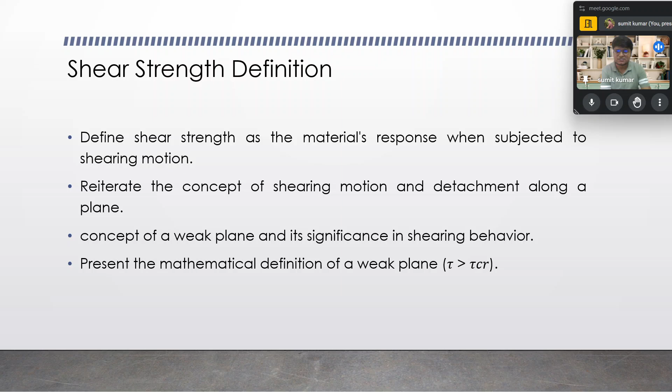So this coursework is named Geotechnical Engineering 2. Till the last 4 weeks, we have understood the different points of shear strength, the Mohr circle, how the Mohr circle works, how the different tests are performed. In the previous class, we started with the definition, and afterwards we moved to the factors that affect the shearing criteria in one way or another.

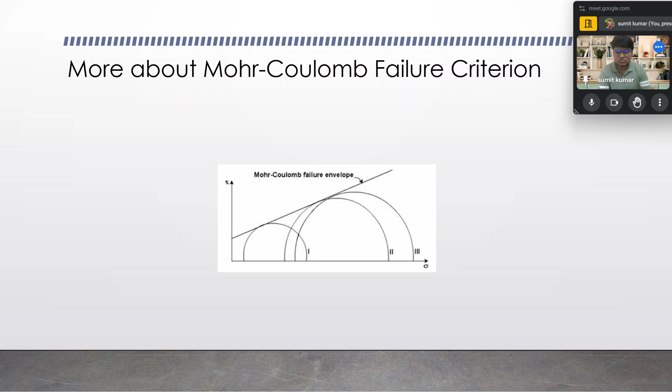We have taken the example over there. We vary the sigma 3 value first, and afterward the deviating stress is applied, and we see how the variation takes place. Those things are discussed with the help of this graph as well. Apart from that, what I said earlier will also be discussed here.

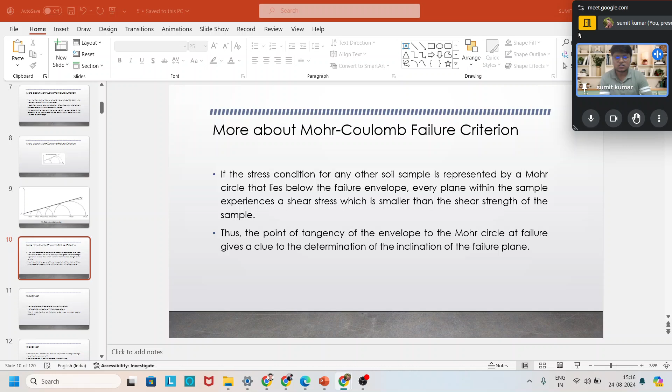Yes, right. Okay, so we are talking about what we have gone through during the previous session, so that's a quick revision. We will move ahead with the new content. So we have gone across the Mohr-Coulomb failure criteria.

We understand how the Mohr-Coulomb failure criteria takes place. We understand the triaxial test, the three types of tests performed during the triaxial test, like UU test, CU test, and CD test. We have gone across that.

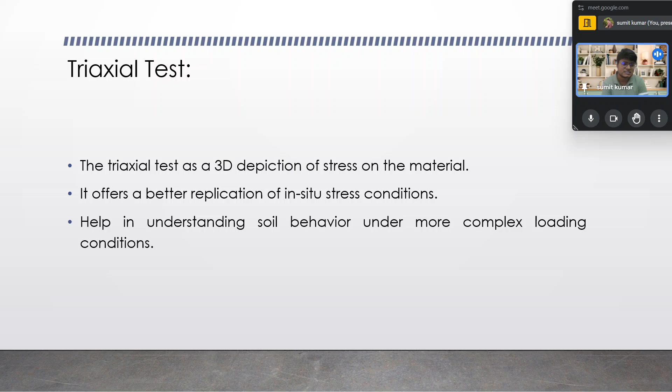We understand how these tests affect conditions, what are the drainage conditions in which the volume remains constant and how the volume gets changed. We also understand that if we consider the effective stress criteria and the total stress criteria, how the value of C and phi, and C dash and phi dash, changes for the different tests.

We also understand the equipment size normally used, like the length to diameter ratio and so on. We have seen the schematic diagram and the test procedure. I am not going to discuss it today because we have already covered it. I'm just giving a quick recap so that the things we have gone through during the previous class will be in your mind.

Okay, so we have understood those things. Setups - what are the setups? What is the first stage, like the consolidation stage, and the second stage, the deviating stage. In the consolidation stage, the pressure is applied with the help of water. First of all, how the sample is prepared.

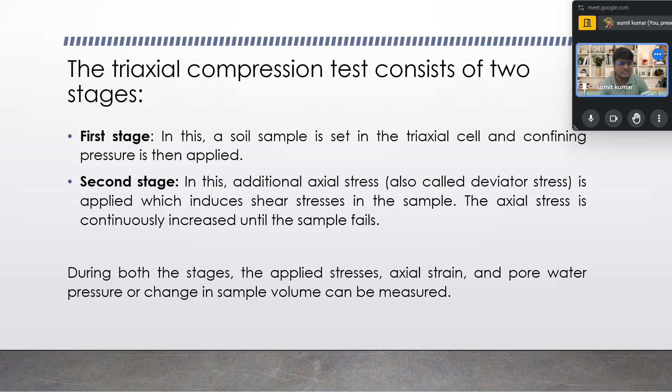That's not the problem. Okay, and we have understood the pore water pressure measurement, analysis parameters, like cohesion and angle of internal friction.

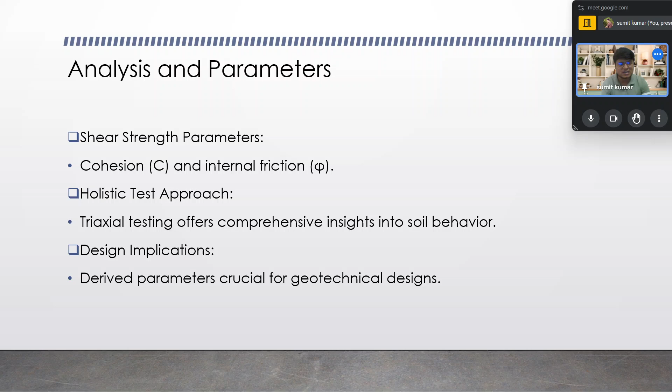We have to understand some of the important formulas. Remember that sigma 1 equals sigma 3 times tan square of (45 plus phi/2) plus 2c tan(45 plus phi/2). Sigma 3 is the stress during the confining stage. Sigma 1 minus sigma 3 equals sigma d, the deviator stress applied during the second, deviating stage. Okay, so those things we have discussed.

We understand the significance of the triaxial test, how it implements the physical field condition. As some new people have joined, I will again explain the physical significance involved, that's not a problem. Some points are also covered in this lecture which we will discuss about the triaxial test before moving to the problem, so that's not an issue, but I suggest you see it.

We have understood the triaxial test, and we see that it signifies the real field condition in a laboratory in a way. How? Consider there is a table in your room, and consider that the soil mass from the ground to the height of the table is soil. If you consider a specific section, say 10 or 20 cm below the table, a cylindrical soil section, you can see it, assume this pen represents it, it's not very visible.

If you consider a specific cylindrical section, the stress on that section is applied by the adjacent soil mass only, and that stress is applied in the laboratory with the help of water in the triaxial test. As some building or construction work goes on over the soil mass, some stress from above is also applied, which actually happens in the physical condition as well. So it simplifies the practical implementation of the field soil condition into the laboratory in one way or another. We will keep discussing this again and again until we finish shear strength; afterwards, when we move to earth pressure, we will move to a new condition. So we understand the significance, and that's where it lies.

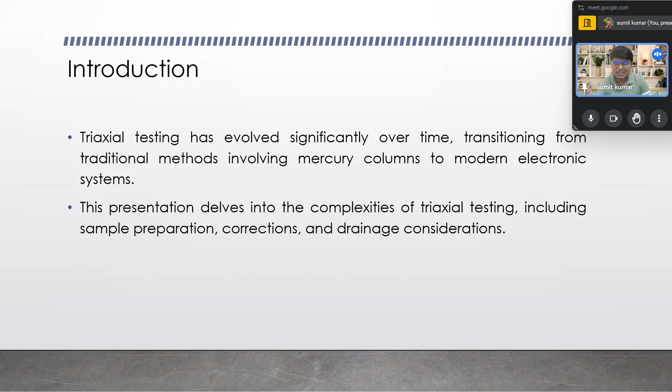We also understand the advanced insights in triaxial testing techniques. We have understood the mercury column era, and in the modern era, how load frames, plungers, and probing devices came into use, whereas earlier mercury-based things were used. As technology advanced, the calculations became more precise, and the results obtained are very close to what actually happens in the field. So that's what we have understood.

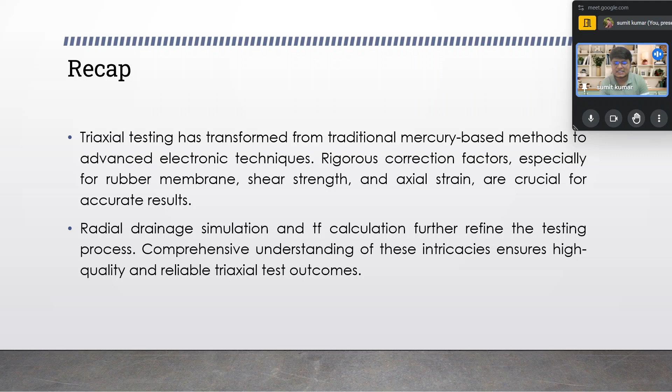We also understand the correction factor, its importance, and why it is needed, like the radial drainage consideration and different approaches we have understood. We have also understood the UU test and CD test over there.

We understand that in the UU test, the unconsolidated undrained test, during both stages, the consolidation stage and the deviator stress stage, drainage is not allowed, water is not allowed to flow out, so the volume remains constant. We have understood these things, and also the CU and CD tests, how the Mohr failure envelope is formed, and whether C_CU equals C_CD or not, and why not. So those things we have understood during our previous lectures.

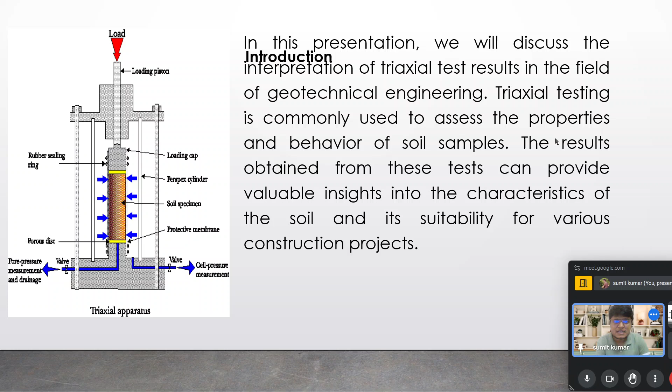So we will move ahead and see in this presentation, in today's lecture, we will discuss the interpretation of the triaxial test result in the field of geotechnical engineering.

Triaxial testing is commonly used to assess the properties and behavior of soil samples. The results from these tests can provide valuable insight into the characteristics of the soil and suitability for various construction projects. From the very first class, I have said clearly what these things are, when we are performing these tests and gaining knowledge in this direction.

We should always ask three questions whenever studying anything: why it is important, why we are reading it. So why is shear strength so important? Shear strength is important in all types of projects. Before construction of any superstructure, infrastructure project, building, road, or railway structure, we need to understand how much load the soil could bear before designing any foundation. That's why shear strength is one of the most important criteria.

The purpose of triaxial test: it is primarily conducted to identify any issue with the soil, as well as to validate the effectiveness and compaction effort. By measuring the pore water pressure during the undrained testing, engineers can gain a better understanding of the soil response and behavior under different stress conditions. This information is crucial for developing an approach for any construction work.

When interpreting pore water pressure, as I said in the second class, water is the biggest enemy of the soil. If the water table is far below the ground surface, 90% of the problem gets eradicated. As you may recall from geotechnical engineering one, in the chapter on total stress, effective stress, and pore water pressure, you understand that as the water table rises, the effective stress value decreases.

Initially we understand shear strength equals C plus sigma tan phi, but later we see shear strength equals C dash plus sigma dash tan phi dash, because we consider the effective stress. Earlier constructions based on the total stress approach got damaged afterward, so the modified Mohr Coulomb theory evolved, stating that as the water table rises, suppose up to the ground surface, the effective stress gets reduced by almost half.

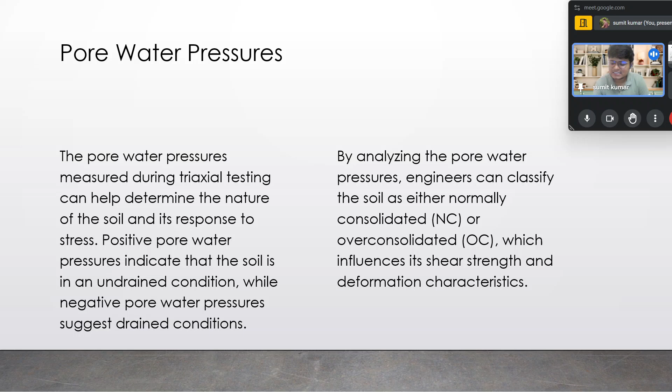Now developing the Mohr failure envelope: the results obtained from the triaxial test can be used to develop the Mohr failure envelope. As shown in the recap of the last session, the value of sigma 3 is found, and by varying sigma 3 and sigma 1.

By varying the value of sigma 3, the sigma 1 value also got changed. By drawing a common tangent passing through those Mohr circles, the Mohr Coulomb failure envelope is formed. When plotting that, the intercept on the tau axis is said to be cohesion, and phi is the angle of internal friction, which is the angle made by the horizontal axis with the intercept of the Mohr Coulomb failure envelope.

When we talk about economic consideration, it is most important to consider the economic aspects of geotechnical engineering projects. The process of filling and compacting soil involves significant cost, as it requires excavation, crushing, and compaction of soil material. That cost needs to be understood and taken care of during construction activity and testing, so we try to justify those things. Engineers must carefully analyze the results and optimize the construction process to ensure cost effectiveness and minimize potential risk.

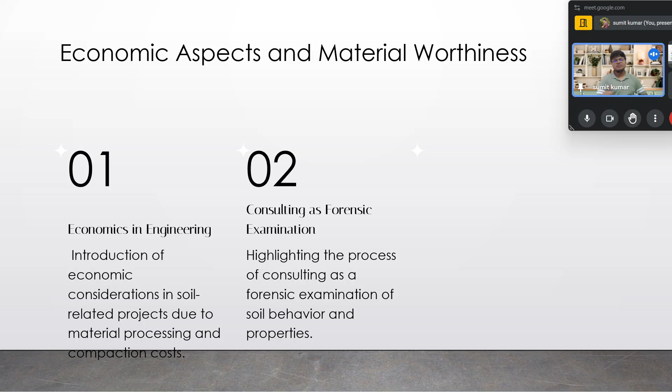Okay, so we will recap this section. We understand the tri-axial test result is a critical aspect of geotechnical engineering, and one of the most important things is pore water pressure and the development of the Mohr Coulomb envelope. Considering the economic factors, engineers can make informed decisions regarding the suitability and stability of soil for various construction projects.

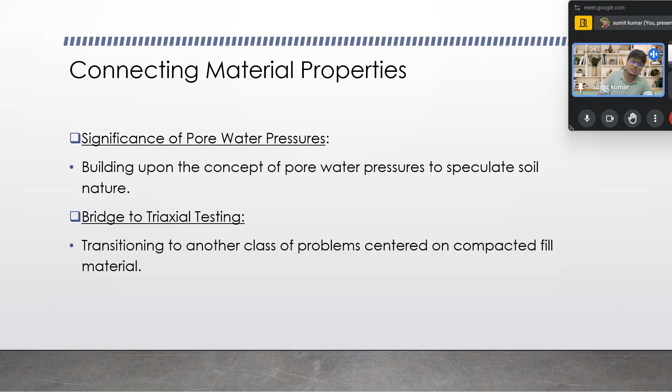Now, compaction and soil characterization reflect methods like the sand replacement method and the core cutter method. As you are aware, the core cutter method allows us to find the dry density and the optimum moisture content of the soil. How the core cutter method is performed, you must be aware — if not, I will explain quickly. In the core cutter method, first we take equipment like the hammer and the core cutter equipment.

We take it to the field. We clean a place over there and want to perform the test. After that, the collar is placed over the core cutter, the cylindrical sample, and then the hammer is applied from the upward direction.

The core cutter gets inserted into the soil. Afterwards, we excavate the core cutter by removing the soil around it without disturbing the soil sample within it.

After that, we determine the moisture content by taking a sample of soil from the interior. Once the moisture content is found, and since the weight of the soil in the core cutter is known, we find the bulk density, as its volume is also known from its length and diameter. After getting the moisture content, we apply the relation gamma D equals gamma B by 1 plus W, where gamma D is the dry density, gamma B is the bulk density, and W is the water content. With the help of that, we are able to find the dry density.

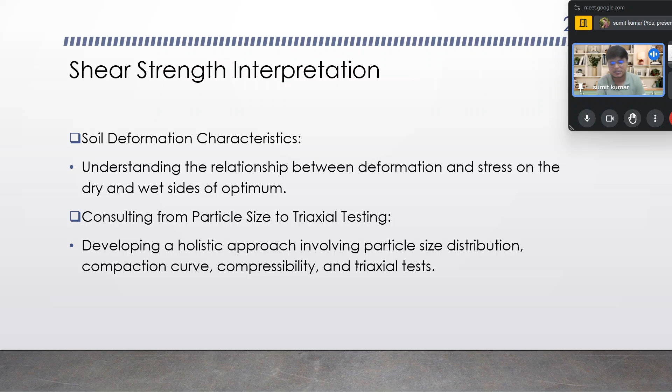So these are the questions, but everything is not mentioned over here, so leave it, we will not cover this here. In the last 15 problems these questions are repeated again, and I will explain there.

The soil compaction to the shear strength analysis exemplifies the intricate layers of geotechnical engineering by skillfully combining laboratory tests and field knowledge. Engineers unlock insight crucial for the safe and efficient execution of soil related projects.

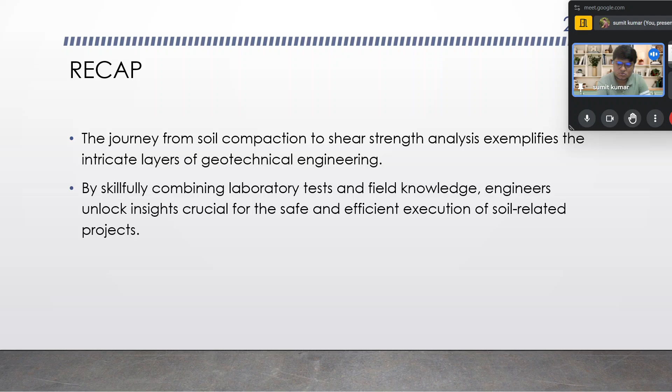Now we are going to decode the soil behavior through shear strength analysis, a deep dive into soft clay. First we start with the introduction for this section. So give me a minute.

In geotechnical engineering, we explore the dynamic relationship between compaction, shear strength, and pore water pressure in soft clay. We understand how the undrained test, specifically the CU test, reveals crucial information about soil behavior. When we say CU test, we mean the consolidated undrained test.

In this test we understand things like long term and short term stability. When we say long term and short term stability, we consider how much time the test takes, like in the triaxial test we also have the CD test, which takes place very slowly as compared, because when we say CD test, the consolidated drained test, the water is allowed to flow out during both stages.

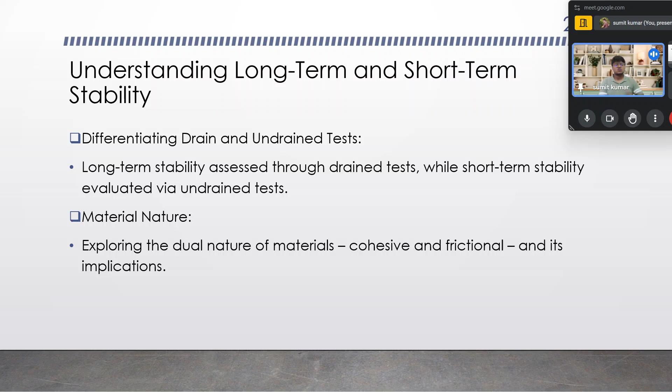So when we talk about the material nature, there is a dual nature of material - cohesive and frictional - and its implication. It is always believed that soil is not only cohesive or only sandy. The soil should be C-phi soil, meaning it must have some cohesion and might have some angle of internal friction, which implies the soil property at any specific site.

So you need to understand those things as well when we discuss a problem in which a UU test is conducted on a soft clay sample, prompting about its nature and its necessity for triaxial testing.

So here, a test method like the unconsolidated undrained (UU) test using a vane shear test setup takes place, because we know the vane shear test is performed on soft soil. Over there, a torque T is applied, and the relation is T divided by pi d square into H by 2 plus D by 6, where H is the height, D is the diameter of the vane, and H is the height of the section which is inserted into the soil.

That is one way and another way - there the H by 2 plus D by 6, and the H plus D by 12 relations are there.

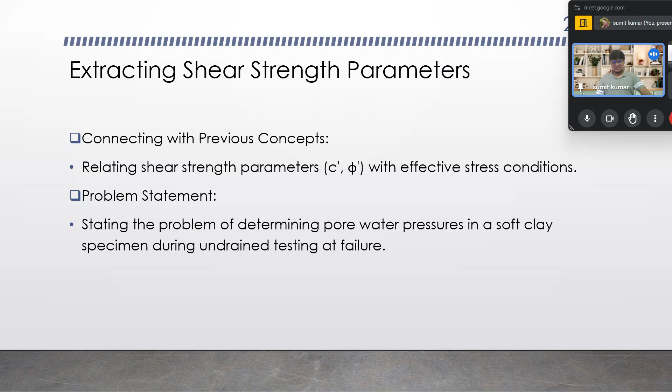Now when we talk about the Mohr circle and its envelope, we create Mohr circles for the three specimens and establish a unique Mohr circle envelope for the soft clay, analyzing the stress condition and their relevance for the problem - identifying soft clay as a normally consolidated (NC) material and deriving the parameters phi not equal to 0 and c dash equal to 0.

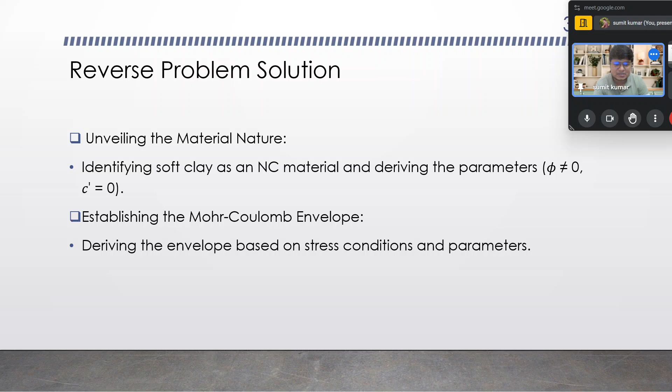After that, establishing the Mohr-Coulomb failure envelope is formed. So sigma 1 and sigma 3 are known for the different specific sections, by which we draw the tangent to form the Mohr-Coulomb failure envelope. As we see, the comprehensive failure condition relative to the pore water pressure is also formed.

So here we understand the intricate process of revealing the soil behavior in soft clay through the undrained test, and the continuous material properties test condition, and the laboratory method under the problems required for geotechnical engineering analysis.

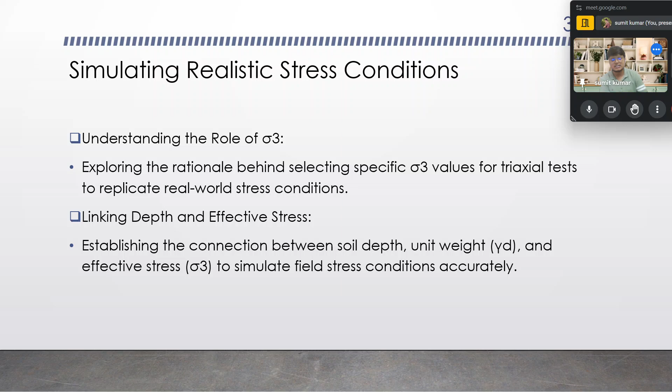The role of back pressure is very much important as it is a concept of applying back pressure during the triaxial test to prevent the sample from collapse and signify real life conditions as in the field. The back pressure, in addition to the pore water pressure, is preserving the physical integrity of the sample.

As you are aware about the Skempton parameters A and B, we talk about sigma and B, A and B are there. So B is delta U by delta sigma 3. And A bar is equal to AB, where A bar equals the change in pore water pressure during the deviating stress condition. By interrelating those two, we are able to find delta UD.

When we talk about the significance, when the value of the Skempton pore water parameter B is one, we say that the condition of saturated condition is achieved.

Exploring the limitation of the traditional triaxial testing for unsaturated soils, and the need for back pressure to ensure the saturated condition, we perform this. As you may be aware or have seen the triaxial apparatus, the demonstrated figure was also seen during the last class.

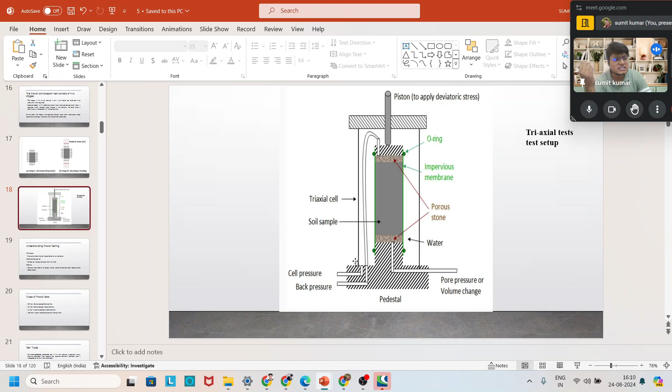Over here you can see that the pore water pressure, cell pressure, back pressure, everything is demonstrated. We are talking about these things only over there as well. The schematic diagram is seen by you. Now I will move ahead.

So the limitation of the traditional triaxial testing for unsaturated soil, and the need for back pressure to ensure the saturated condition, is now possible in modern setups. The technique of using back pressure to saturate the unsaturated soil sample makes them suitable for conventional testing. When we talk about the different phases involved in the testing, first is the sample consolidation and undrained testing.

In this phase, the undrained condition and its importance for pore water pressure development is taken care of.

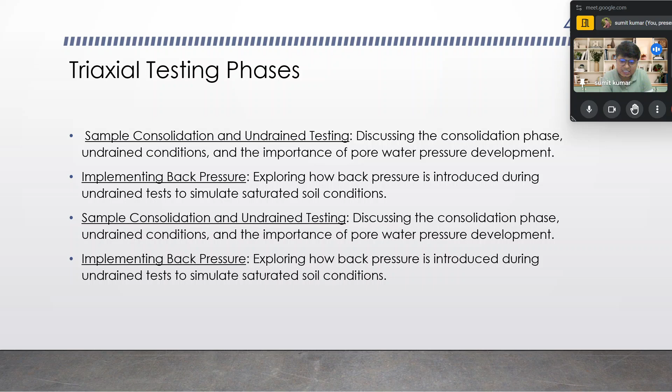Afterward, the back pressure is implemented, in which we explore how back pressure is introduced during the undrained test to simulate saturated conditions. Then sample consolidation and undrained testing takes place, discussing the consolidation phase, undrained condition, and importance of pore water pressure development. Afterwards, implementation of back pressure takes place, exploring how back pressure is introduced during the undrained test to simulate saturated soil conditions.

When we talk about the stress path and soil response, the stress path and the Mohr-Coulomb envelope, revisiting the stress path, as you are aware about the PQ curve, P is sigma 1 plus sigma 3 by 2, and Q is sigma 1 minus sigma 3 by 2.

So the stress path is plotted in that way only. When we talk about the stress path, we understand the regulation of shear strength.

As we talk about its applications, the stress path concept applies to practical scenarios like basement construction and excavation, as you see that we have been able to...

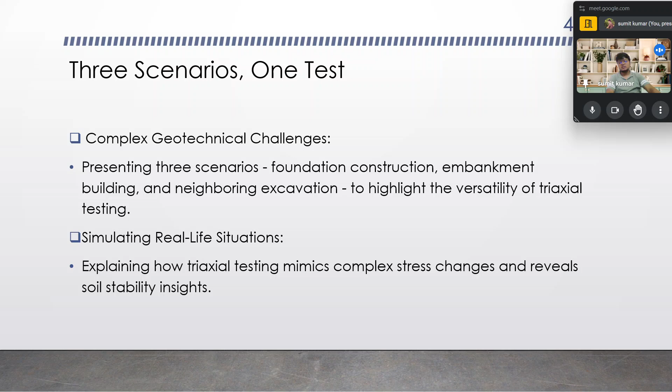When we talk about some more scenarios like complex geotechnical challenges, there are three scenarios: foundation construction, embankment building, and new construction in the neighborhood of existing conditions, to highlight the versatility of triaxial testing. Simulating the real life situation, exploring how triaxial testing mimics complex stress changes and reveals soil stability insights.

When we conclude this section, we say that in triaxial testing, augmented by the concept of back pressure, this emerges as a robust technique to mirror natural stress conditions and unravel soil behavior by manipulating stress and preserving sample integrity.

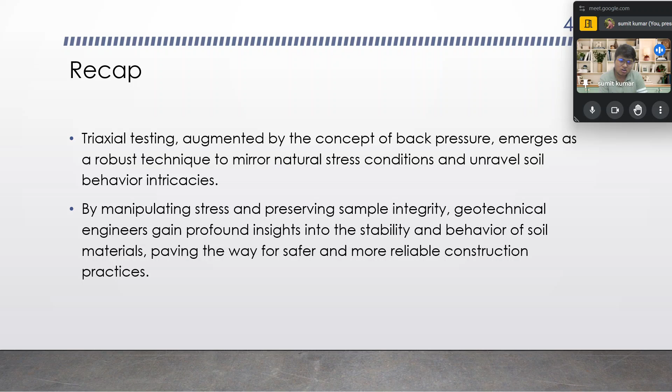Geotechnical engineers gain profound insight into the stability and behavior of soil material, paving the way for safer and more reliable construction practices.

Then we talk about factor A and factor B. First of all, A is delta U by delta sigma 1 minus sigma 3, the change in pore water pressure by the change in stresses in the deviatoric section, whereas B is delta U by delta sigma 3, where A dash is equal to A into B.

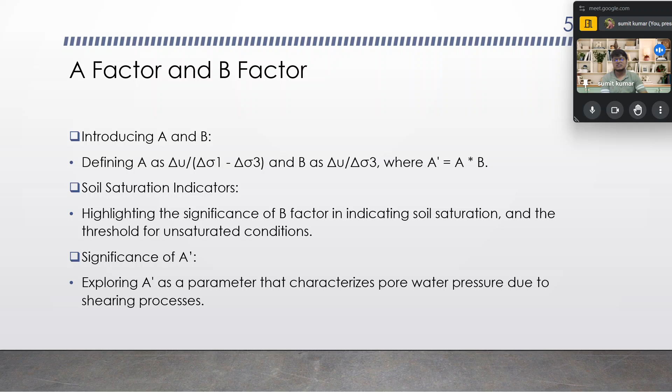When we talk about the significance of A dash, it's a parameter that characterizes the pore water pressure due to the shearing process as it takes place during the shearing condition in the deviatoric stress condition.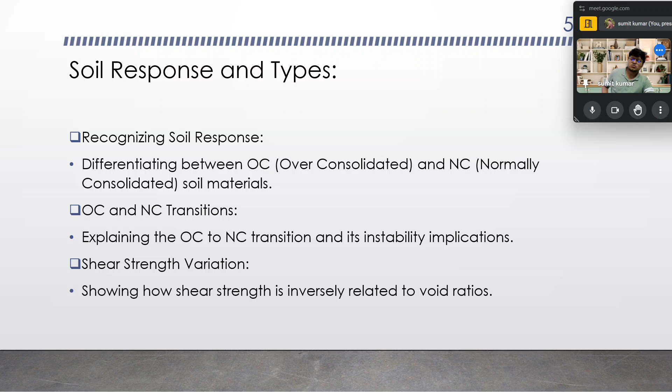Demonstrating that B equal to 1 characterizes the saturated sample as said earlier, and analyzing how parameter A represents the pore water pressure changes due to shearing, and the difference between over-consolidated and normally consolidated soil material, explaining the over-consolidated and normally consolidated transition and its instability implications, showing how shear strength is inversely related to the void ratio.

When we talk about a triaxial testing scenario, evaluating A as a function of over-consolidation ratio and its significance for designers, as it is very important during the test to know whether the soil is in the saturated state or not, or whether it is in the unsaturated state.

It is signified with the help of this parameter only, stressing the importance of cross-checking results with material properties, the stress range, and the project objectives, exploring different tests, discussing the five types of triaxial testing problems, and providing insight into interpretation of the results.

When we recap this section, we say that the triaxial test stands as a cornerstone in geotechnical engineering, offering a profound understanding of soil behavior under different stress scenarios by comprehensively analyzing parameters like back pressure, A and B factor, and characterizing the soil.

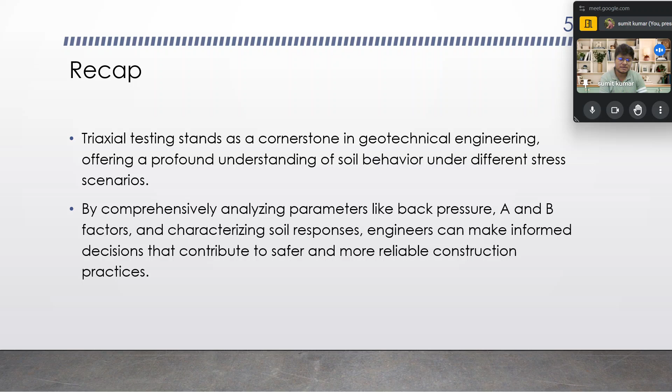This way, engineers can make informed decisions that contribute to safer and more reliable construction.

Now, understanding the pore water pressure parameter in triaxial testing.

So first of all, we start with the introduction, in which the presentation focuses on comprehending the pore water pressure parameter in triaxial testing discussed here. Determination and implementation of understanding these parameters is essential both for academic purposes as well as for practical implementation by design engineers.

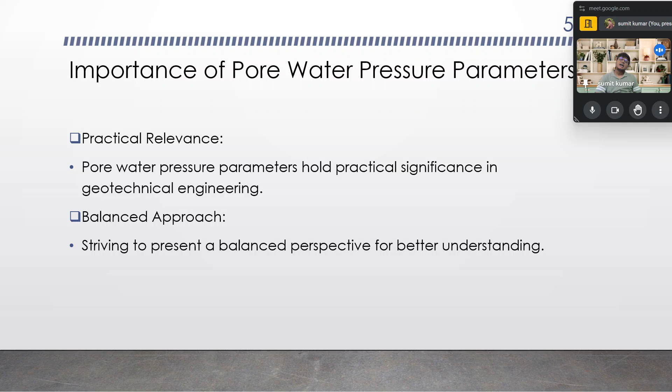The pore water pressure parameter holds practical significance in geotechnical engineering, and we strive to present a balanced perspective for better understanding, explaining isotropic loading as a stress applied uniformly from all directions, like sigma 1, sigma 2, sigma 3.

The Skempton equation relates delta U equal to delta U1 plus delta U2, relating isotropic loading to delta sigma 3 through the B parameter, defining the B parameter as delta U1 by delta sigma 3 and its role in characterizing the soil mass.

The B parameter formula is B equal to 1 by 1 plus CV by CC, where CV is the fluid compressibility and CC is the soil skeletal compressibility.

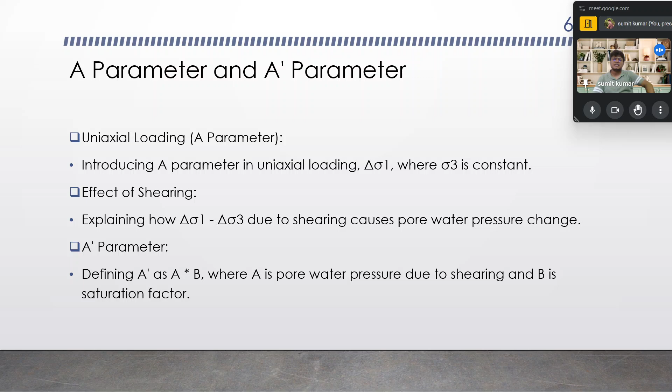The A parameter, when we talk about uniaxial loading, is introduced at delta sigma 1 where delta sigma 3 is constant, explaining the effect of shearing and how delta sigma 1 minus delta sigma 3 due to shearing causes pore water pressure changes. We define A dash as A into B, where A is the pore water pressure parameter due to shearing and B is the saturation factor, which is 0 for unsaturated soil and 1 for saturated soil.

When we formulate the total pore water pressure, deriving the equation U equal to B into delta sigma 3 plus A into delta sigma 1 minus delta sigma 3, its simplified form utilizes the A parameter, providing flexibility in using the parameter depending on soil condition and testing objectives.

When we talk about these applications, we will see the problems at the end regarding the same. When we talk about the role of B as the saturation sample, we explore B equal to 1 as a saturated sample and its implications on soil saturation.

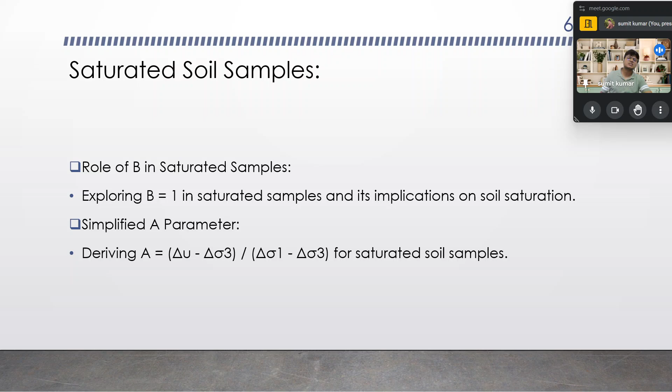When we simplify the A parameter, deriving A as delta U minus delta sigma 3 by delta sigma 1 minus delta sigma 3, for the saturated soil sample. And when we talk about conventional tri-axial cell testing, describing the process of fixing sigma 3 during consolidation and its effect on the A parameter.

When we talk about determining delta sigma 1, we explain how the change in sigma 1 is determined using load cells or a proving ring.

When we recap this section, we say that the pore water pressure parameters B and A hold valuable insight into soil behavior under different loading conditions. Understanding their derivations, applications, and significance in various scenarios equips the geotechnical engineer with essential tools for accurate interpretations and informed decision making in the field.

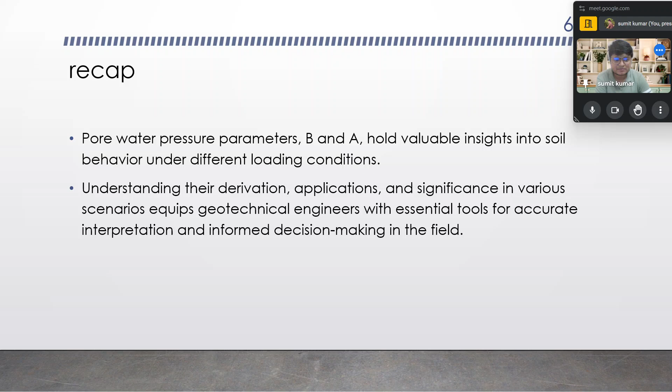Now we are going to explore the pore water pressure parameter through practical examples. So what are the examples we are going through? We will see over here.

As we talk about the Skempton parameters B and A, we come to know B as the Skempton parameter. With the help of that, we are able to find in the tri-axial cell testing whether the sample is saturated or unsaturated. Similarly, with the help of A, we reveal the situation during the deviatoric stress condition.

Before formulating the sample, first of all in the laboratory, when we go to form our sample, we see that first we make our sample stand in the confining stage. So we have to understand at what time the stress needs to be applied from the vertical direction, in order to achieve enough stress that failure takes place in the deviatoric condition, so that sigma 1 and sigma 3 would be found to form a Mohr circle.

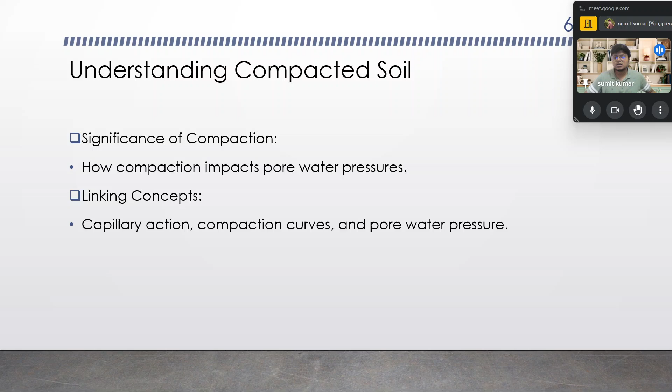And when we talk about its significance on compaction, we say how compaction impacts the pore water pressure, how capillary action, compaction curves, and pore water pressure work out.

Okay, how do we calculate the parameters? We say that A parameter is defined as A dash equal to A into B, and its significance. So the A parameter: A equal to delta U minus delta sigma 3 by delta sigma 1 minus delta sigma 3. And when we talk about material characterization, it highlights the role of tri-axial testing in understanding soil behavior and the shearing process.

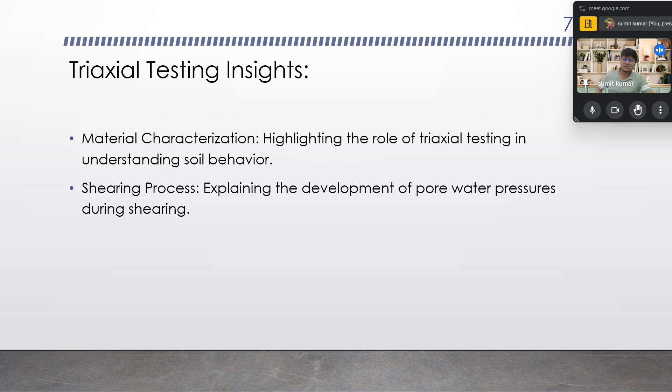Now we analyze the pore water pressure parameter and the shear strength of soil. Before we go ahead, we will go through the questions which I put out for you, and you will go through those problems before moving ahead.

Okay, see. Okay, so I will take a pen as well.

So we are going with the questions that will make you understand the things which we are studying, how we are solving the problems related to the things we are covering here. Okay, first of all, what is the first question? The first question is a simple true and false question, and these are the most standard questions asked in the GATE examination or the civil engineering services examination. So the first question is: true or false?

This is a true or false problem. The question says that if the Mohr circle for a given state of stress lies entirely below the Mohr circle envelope of a soil, then the soil will be unstable for that state of stress. Whether it is true or false - one can easily say that this statement is false, only because...

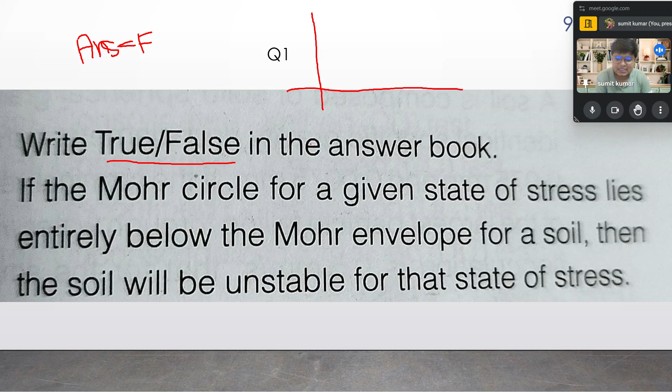At this point, this is sigma 3, this is sigma 1, this is sigma 3 dash, and over here sigma 1 dash, right? So this is the failure envelope, and if at any point a stress is at this position - if the Mohr circle of a given state of stress lies entirely below the Mohr envelope of the soil, then the soil will be unstable.

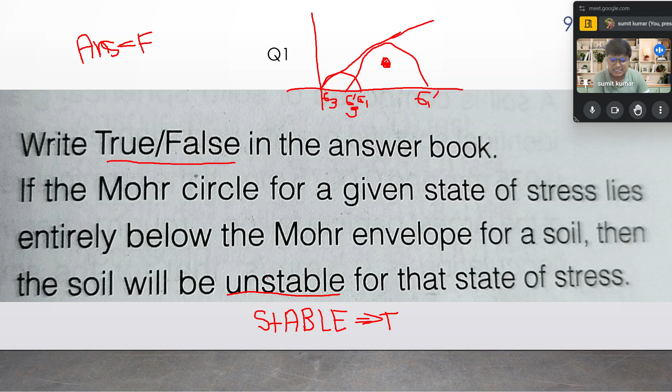Unstable is a word which is false. If it is stable, then there is no problem. But over here it is written unstable, so if it is stable then it is going to be true. But as it is mentioned unstable, when the state of stress is below, unstable is false. That's why our answer is false.

Explanation is also mentioned over here: if a Mohr circle for a given state of stress lies entirely below the Mohr circle envelope of the soil, then the soil will be stable for that state of stress, right? So this is the first and very basic problem.

Now we move to our next problem. It says that an unconfined compression test yields a strength of 0.1 Newton per mm square, if the failure plane is inclined at 50 degrees to the horizontal. What are the values of the shear strength parameters? So it's asking about the value of C and the value of phi for the given condition, right?

I think this is understood. So unconfined compression test yield strength - this is the shear strength S, and it is asking about C and phi. So over here you see the unconfined compression test. The value of sigma 3 is 0, and shear strength S equal to 2C tan(45 + phi/2). Sigma 1 equal to sigma 3 tan square(45 + phi/2) plus 2C tan(45 + phi/2), right.

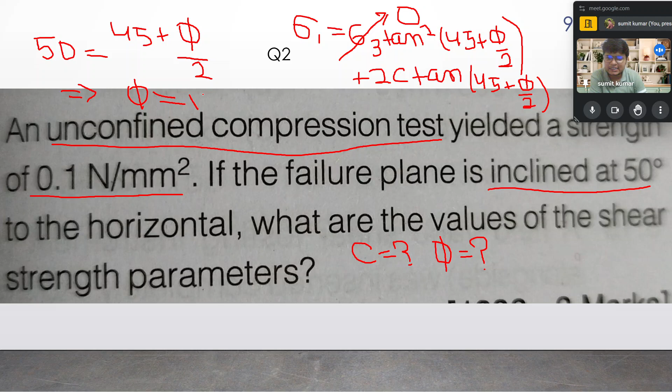So the value of phi should also be known. By solving this, we get 50 minus 45, so phi equal to 10. Now we need to find C only. As phi is known and sigma 1 is known, you can find C as 0.0419 and phi as 10 degrees, which we already found in our previous section, okay right?

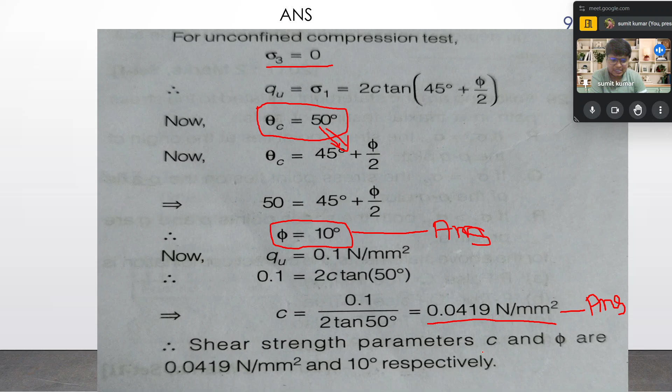Right, so our shear strength parameters C and phi are found. So this is the question over here. Now we move to our next problem. The next problem says that in the unconfined compression test the clay fails in the range. Okay, what is the question?

Compression test of a stiff clay fails in the range of 50 kilonewton per meter square, 50 to 100, 100 to 200 or above 200. So over here the answer is going to be 100 to 200 kilonewton per meter square as it is the standard value, right? Okay, now we move to our next problem.

So over here two problems are mentioned. The first problem states: what is the shear strength in terms of effective stress on a plane within a saturated soil mass at a point where the total normal stress sigma n is 295 kPa and the pore water pressure is 120 kPa, and the effective stress and shear strength parameters C dash and phi dash are given.

Normal stress is 295 and pore water pressure is 120. So S equal to C plus sigma n tan phi. So sigma n is going to be 295 minus 120, right? Okay, so where is the pen? The solution is already mentioned on the next page, but for understanding, S equal to C plus sigma n tan phi.

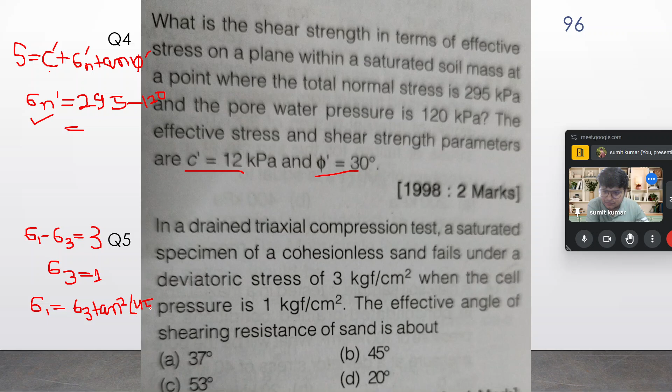And the effective angle of shearing resistance of the sand is what they are asking. So we will solve sigma 1 equal to sigma 3 tan square of 45 plus phi by 2, right?

So from here, when we use the value of sigma 3 as 1 and value of sigma 1 as 4, and when we solve that, we are able to find the value of phi. See, sigma 1 minus sigma 3 is known, sigma 1 is 4, sigma 3 is already known as 1, and when we solve, we are able to find the value of alpha first - 45 plus phi by 2 is called alpha - and after that we find the value of phi at 37 degrees, so our answer is 37 degrees.

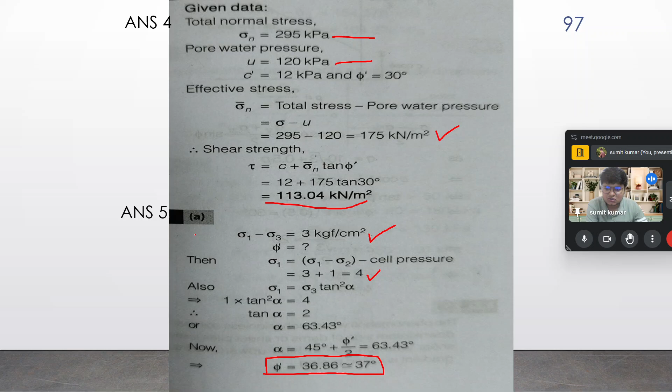Find the shear strength on a plane within a saturated soil mass at a point where the total normal stress is 300 and the pore water pressure is 150. This is similar to the previous problem, so I will not solve it from scratch since I'd be writing the same equation. I will directly go to the solution and explain from there.

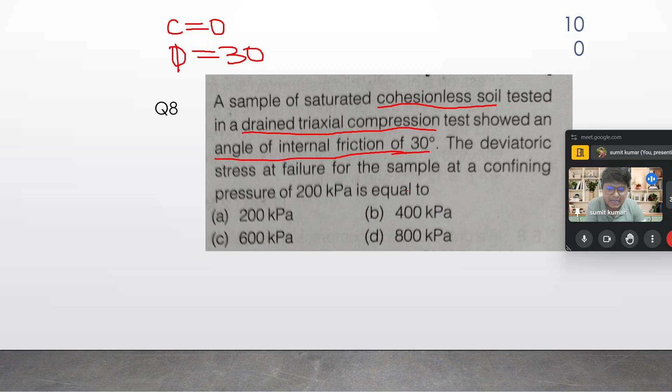The deviator stress at the failure of the sample at confining pressure of 200 kPa is equal to - it is asking sigma d is equal to what? And the value of sigma 3 is also mentioned as 200. So we apply sigma 1 equal to sigma 3 times tan square 45 plus phi by 2 plus 2C tan 45 plus phi by 2. So C is already 0.

So we say sigma 1 equal to sigma 3, means 200, tan square 45 plus 15.

Okay, now I will take a calculator, give me a minute. There is a calculator. I will take the calculator and do the calculation. So I will find 200. The value of sigma 1 is found to be 600.

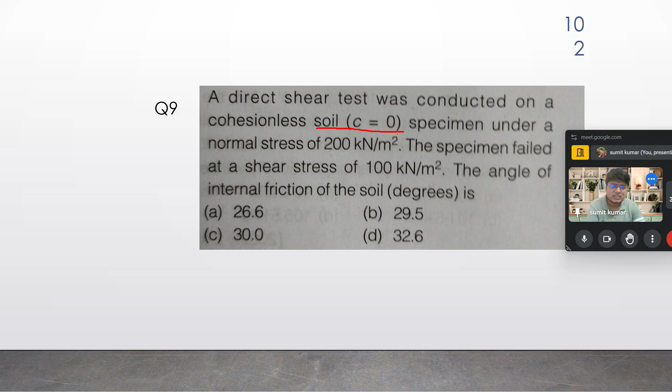Now we move to our next problem. Next problem states that a direct shear test is conducted on a cohesionless soil, C equal to 0 again - you have to mark it down. Specimen under a normal stress, sigma n, is mentioned as 200 kilonewton per meter square. Specimen failed under the shear stress of 100 kilonewton per meter square.

The angle of internal friction of soil in degree: sigma n into tan 45 plus phi by 2 plus C is equal to shear strength, tau, whatever you say. So over here C is 0, so sigma n tan 45 plus phi by 2.

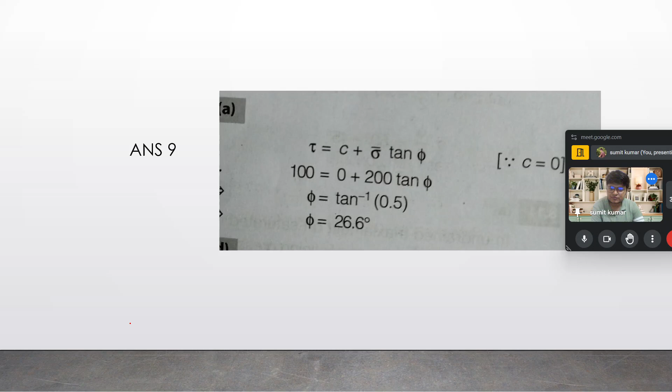Sigma s equal to c plus sigma into tan phi. This is not the sigma. I need an eraser.

Phi equal to 26 degree, 26.56. So option A is the correct answer. Right? Over here you can also see.

Now the next question is that a soil is composed of solid spherical grains of identical specific gravity, and the diameter is between 0.075 mm and 0.0075 mm, with the terminal velocity of the largest particle falling through water without flocculation being 0.5 mm per second. Then that for the smallest will be. So you see the largest particle is 0.075, right? And its velocity is 0.5.

So over here you can see we have to find the velocity through this. So when we make our relation v1 by d1 square equal to v2 by d2 square, as area into velocity is like v is proportional to d square. So from this when we solve, we found the velocity 2 will be nothing but 0.005 mm per second. So you can use 0.005 mm per second. Option number A as a correct answer.

Right? I think over here there will be no doubt in anyone's mind. We will move ahead. Now we will see our next problem. Yes, this is the problem related to vane shear test, and this is one of the most important problems because over here you see the diameter, height. When I talk about the interrelation, T by pi d square into h by 2 plus d by 6, so this is related to that only.

So the question says a field vane shear testing instrument shown alongside was inserted completely in a deposit of a soft saturated silty clay. As we know, this is applicable for soft soil only. If the soil is hard, it is not possible to rotate it, so we are not able to find the strength with the help of this test. So this is the soft saturated silty clay with a vane rod vertical such that the top of the blades were 500 mm below, 500 mm below. Why this is important? Because if it is not below, the relation which we usually use is not applicable.

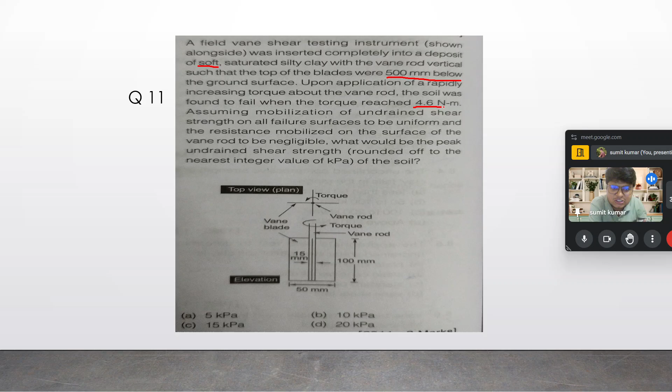So upon application of rapidly increasing the torque about the vane rod, the soil found to fail when the torque reached 4.6 Newton meter. This is nothing but torque T. Okay, I will write the relation as well. Assuming the mobilization of the undrained shear strength on all the failure surface to be uniform, and the resistance mobilized on the surface of the vane rod to be negligible, what would be the peak undrained shear strength rounded off to the nearest integer?

So over here, see, the value of tau is going to be T by pi d square into h by 2 plus d by 6. H by 2 plus d by 6.

Right? Over here, T is nothing but 4.6. D is... H is 100 mm, and D is 50 mm. Okay.

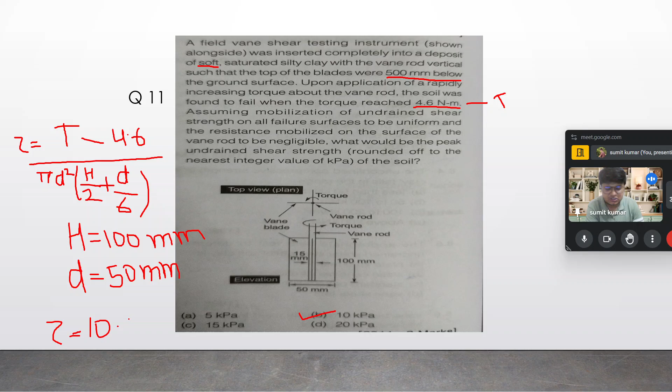Yes, right, so this is going to be our answer. When you solve, you found 10.04. Right, units need to be considered. Okay, so we move to the next problem from here.

As you see, for the set over here, different relations are written. That's not to worry, the relation what I have written is the same thing as this. And when you take the common T by pi d square, when you take common h by 2 plus d by 6, will become, and you are able to find that strength tau or cu, whatever the thing is, is the same in our relation. Okay, now move to the next problem.

Next problem states that for a saturated cohesive soil, a triaxial test yields the angle of internal friction phi as 0, phi as 0.

The conducted test is CD test, CU test, UC test or UU test. So this is a very simple thing. For the clay soil, it is nothing but the UU test, because that simplifies the real field condition - in clay, water is not allowed to drain out in either condition, because it takes too much time to flow out the entire water from there.

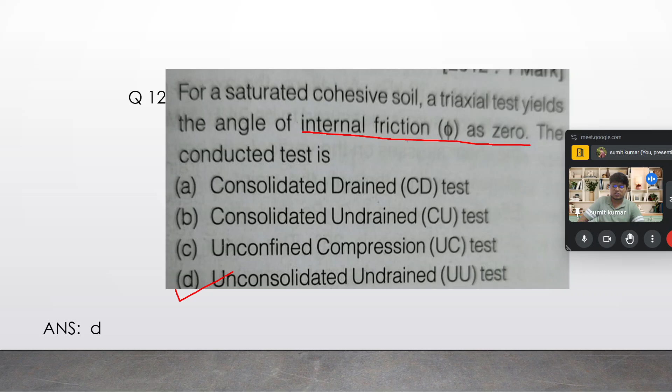Now we move to the next problem. The question states that in the unconsolidated undrained triaxial test, it is observed that an increase in cell pressure from 150 to 250 kPa leads to a pore pressure increase of 80 kPa.

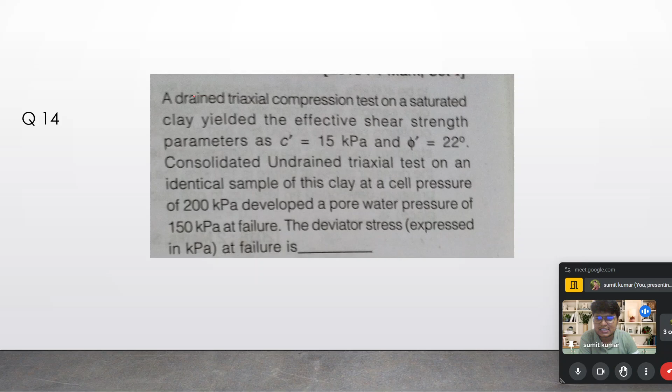The next problem states that a drained triaxial compression test on a saturated clay has effective shear strength parameters C dash and phi dash as given. A consolidated undrained triaxial test on an identical sample of the clay at a cell pressure of 200 kPa, so sigma 3 undrained is 200, developed a pore water pressure of 150 kPa. So U is 150 in the second condition.

They are asking about the deviatoric stress in kPa. So there is no problem in that - we use the relation sigma 1 minus sigma 3, and we use sigma 1 equal to sigma 3 tan square of 45 plus phi by 2, plus 2c tan of 45 plus phi by 2.

We know the value of sigma 3. We find sigma 1 and then subtract sigma 1 minus sigma 3. So first you use sigma 3 dash as 200 minus 150, that is 50, and then use the relation which I have written.

You see over here the relation is written: sigma 1 equal to sigma 3 tan square of 45 plus phi by 2, plus 2c tan of 45 plus phi by 2. Sigma 3 is known, C is known, phi is known, only sigma 1 needs to be found.

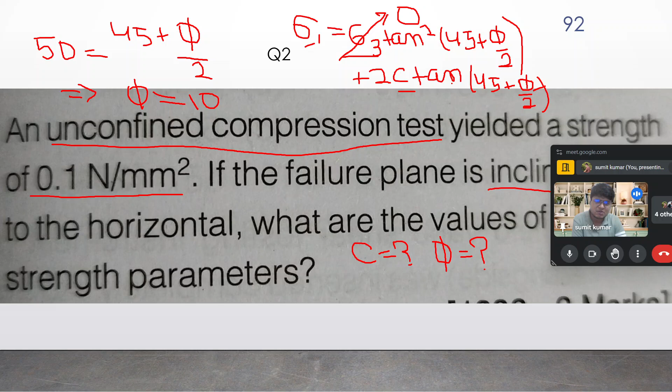When sigma 1 is found, we subtract sigma 1 minus sigma 3 and we are able to find the value of the deviatoric stress at that stage. I will write the equation over here for your convenience, so there will be no doubt.

Sigma 1 equal to sigma 3 tan square of 45 plus phi by 2, plus 2c tan of 45 plus phi by 2. This is the most important relation.

Over here we know the value of sigma 3 dash as 50, and sigma 1 dash we are going to find. Sigma 1 dash equals sigma 1 minus u. Sigma 3 dash is 200 minus 150, so 50, and tan square of 45 plus phi by 2, where phi is 22, so 22 by 2 is 11, plus 2c, two into cohesion is also there, 15 into tan of 45 plus 11.

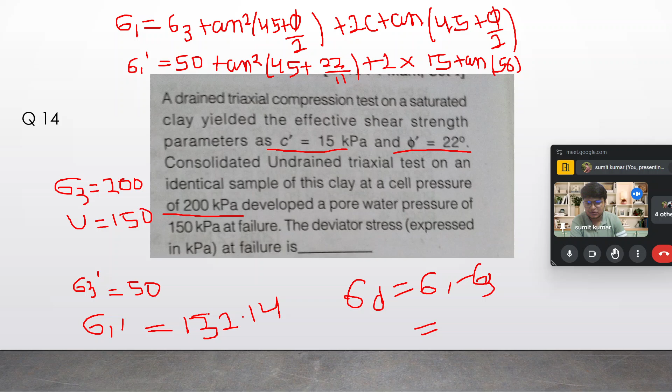So 154 minus 50 is 104. That is the answer.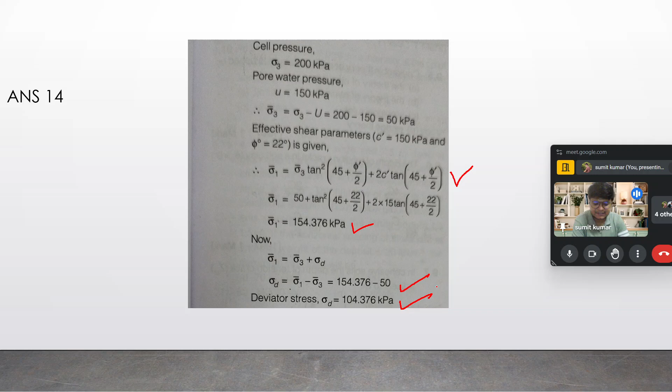Over here you see the same relation is used and the value of sigma 1 is found, and sigma 1 minus sigma 3, sigma d, is found. So this is the answer. We have two more problems left.

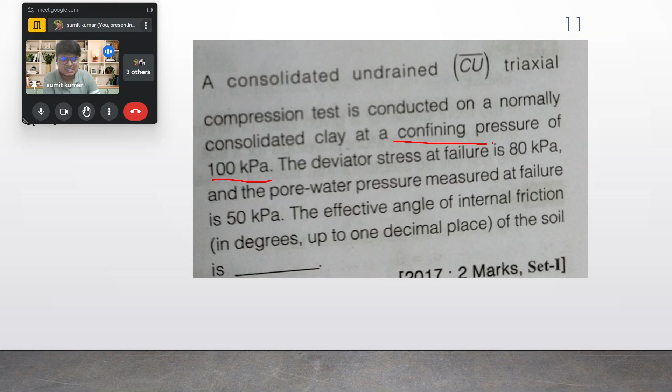Now we move to our last problem of the day. The question states that a consolidated undrained CU triaxial compression test is conducted on a normally consolidated clay at a confining pressure of 100 kPa. Confining pressure means sigma 3. So sigma 3 is 100.

And the deviator stress at failure is 80, meaning sigma d is 80. That is nothing but sigma 1 minus sigma 3, as I have told many times. So if sigma 1 minus sigma 3 is 80, and sigma 3 is 100, then sigma 1 is going to be 180.

The deviator stress at failure is 80 kPa and the pore water pressure measured at failure is 50 kPa. We need to find the effective angle of internal friction. I will show you from the solution itself, and I will erase some part since I have not read the full question.

Over here you can see the value of sigma 3 is 100, sigma d is 80, u is 50. So sigma 1 equals sigma 3 plus sigma d, which is 180, and sigma 1 minus u and sigma 3 minus u are also mentioned. So we are able to find the value.

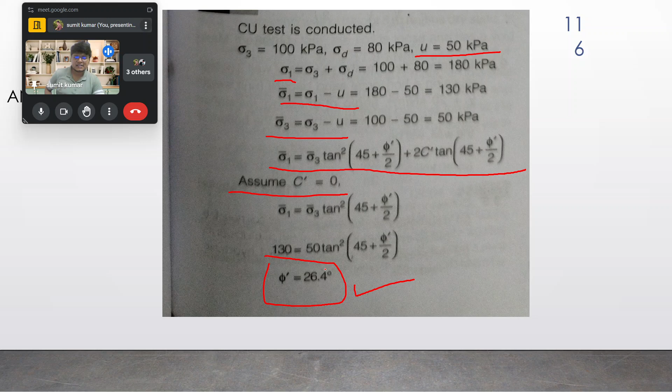And with this, today's session I am going to sum up. During this session, we understand the triaxial test, the problems related to it, and the process of UU, CU, and CD tests to a great extent.